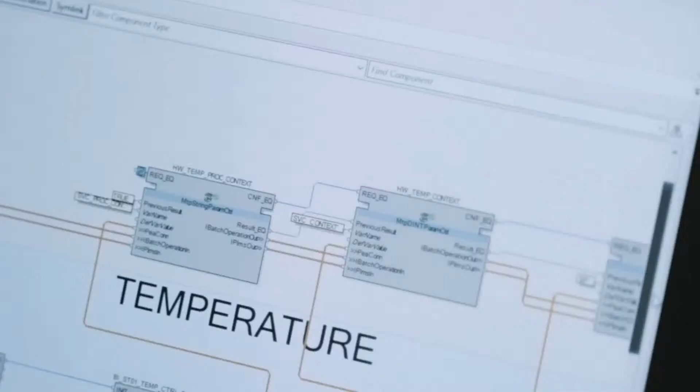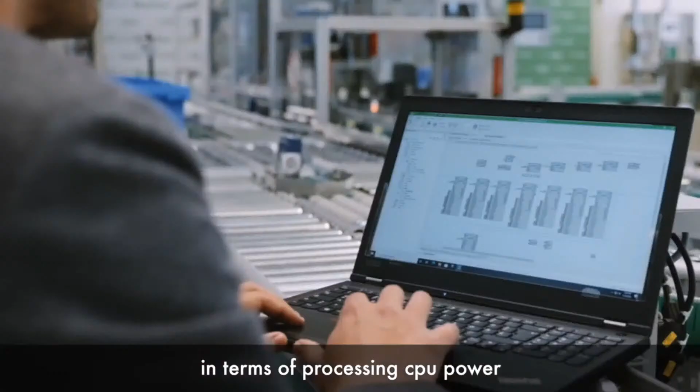universalautomation.org. It's about sharing a technology, a shared runtime execution engine. We call it a game changer in automation because we have, first, one technology which is based on IEC 61499, which is the standard which aims at decoupling hardware and software. Hardware itself is becoming very, very performant in terms of processing and CPU power, and the future is more and more about software. This approach is really a winning approach because it's very, very flexible. You develop the application once and you can reuse it in each different configuration.

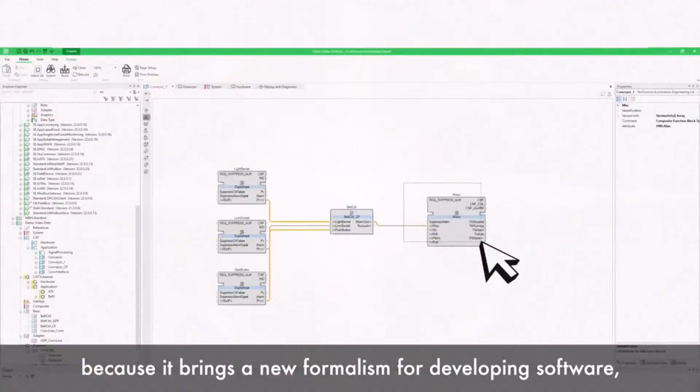That's exactly what Universal Automation and 61499 enables, because it brings a new formalism for developing software, which is object-oriented in nature and which allows deployment over distributed hardware for the actual final control system. So let's say that it's a marriage made in heaven.

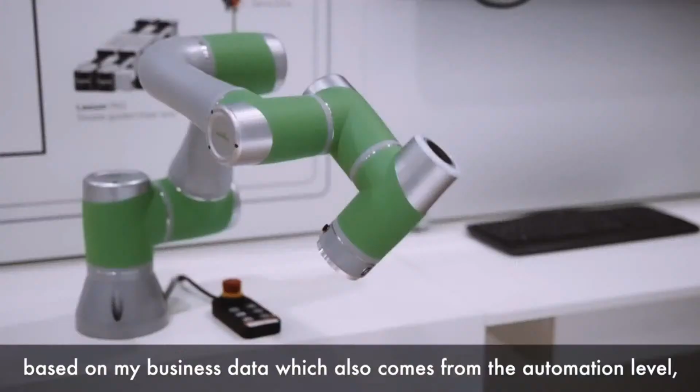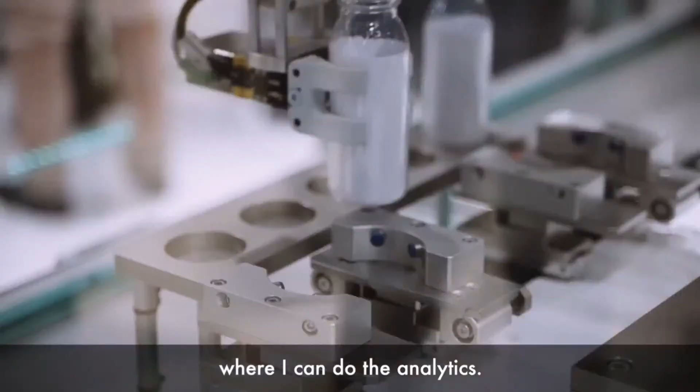So if I want to make more conscious decisions based on my business data, which also come from the automation level, I need universal automation to get this data in an efficient way and with the right engineering efforts on the level where I can run the analytics. Offers are available, not just from Schneider Electric with EcoStruxure Automation Expert, but also from Advantech, from Stahl, from ESA in Italy, and from other companies.

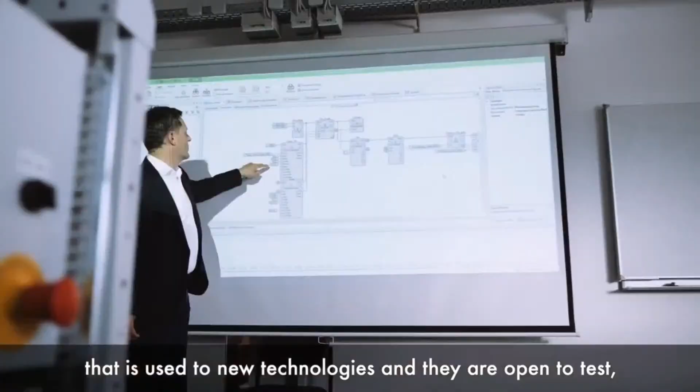Advantech is growing really, really fast. And I believe if you want to keep on growing in the near future, you need to be able to innovate. And when I see the universal automation approach, it is exactly the way of innovation we need to go with. Most of our customers from process automation are pretty conservative, so never change a running system. But now we see a new generation coming up, who is used to new technologies, and they are open to test, to try these new functionalities. And I think most of them pretty well understand the advantages of this.

I'm doing this now for 20 years, and I think over the years, this is the most exciting change. And from my experience, I see that in IT, for example, there has been a big revolution. And I expect the same in automation. I don't know when it will happen. Probably it takes a little bit of time, but probably a revolution will come.

Good morning, good afternoon, everyone, and welcome to this new edition of the UAO Goes Live. Second time this week, and this time we are going to go to Austria, where we discover a bit more about tools and tool concepts for 61499. And I'm happy today to welcome on stage with me Professor Alois Zoitl. Hi, Alois. Hello, everybody. Hi. Yeah, it's a pleasure to have you with us because for sure you are one of the icons for 61499. So having you with us on stage is always a great pleasure.

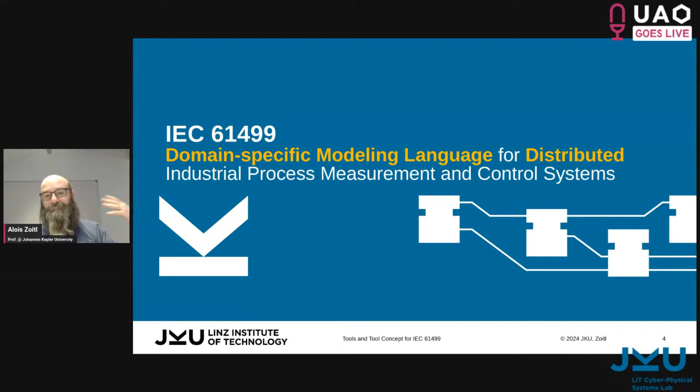In the setting that we are, I will not talk about what 61499 is, but I would like to tell you that we now have even measures. So friends of mine from Vienna University of Technology, Peter Gsellmann, Martin Melik-Merkumians, and Georg Schitter did this very nice work where they used code metrics that were developed to compare different solutions and different languages. And they implemented classical sequential processes and continuous processes in 61499 and 1131 and compared them and compared the complexity.

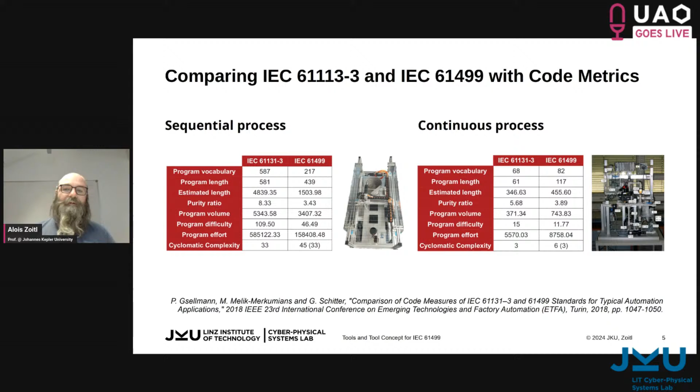And as I said in the introduction with Greg, I want to talk today a bit about what we did in order to leverage the potential of 61499, because my hypothesis for quite some time now is that 61499 from the language perspective is very powerful, but as it's nicely said, a fool with a tool is still a fool. So we need to learn how to use the tool, how to make tools for 61499 to, in the end, get the best out of it. And what I brought here today is an overview of some stuff that we did. It's not all, but I took the highlights of it.

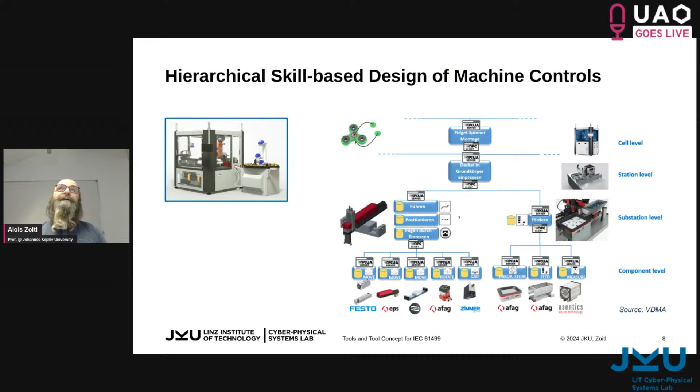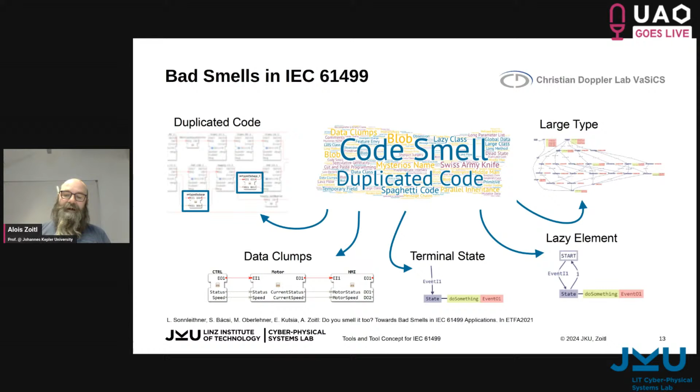And you see here a word cloud of all the different bad smells that were already identified in industry. The big one is duplicated code. There is a Swiss Army knife, spaghetti code. Shotgun surgery is also a very nice one. Cut and paste programming, which unfortunately is still around a lot. You see here certain examples that our first work identified. And one work that I personally like a lot is the topic of feature envy. Feature envy is a kind of measure for badly structured code.

Nonetheless, Lisa Sonnleitner again did that work, found two potential ways and mapped them to 61499. One is the feature envy factor that shows how well a certain function block or module is structured and how much it's connected to the outside. And the other one is the so-called distance metric. The distance metric is even nicer because it gives a connection-wise distance between two blocks, and the distance metric even allows giving hints.

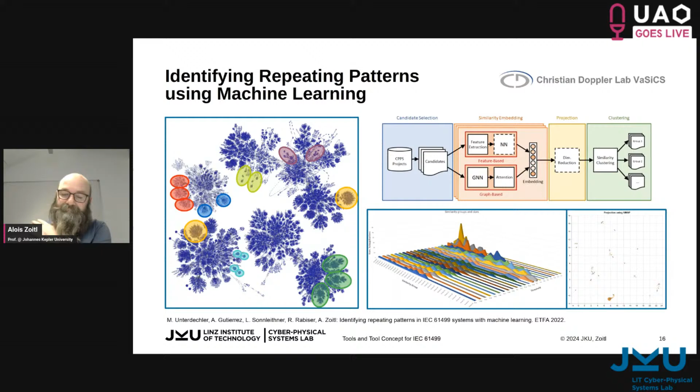When the people showed me the first results, they were not convinced, and they showed me some similarity things, and I found this quite nice because as a control engineer, I could immediately see what the similarities are and what not. So having tools like that can really help to find duplicated code, find similar code, which can later be refactored, reworked to help us get better maintainable code.

We work also on language extensions. What Greg did not say, since 2008, I'm also in the 61499 standardization committee. Since 2015, I'm somehow the convener of the 61499 working group. And as part of that work, I'm also interested in what are the limits and the problems of 61499. So if you find these kinds of things, I would be happy if you drop me an email or send me some kind of message so that I can get that. And we work on language extensions or investigating certain boundaries of the language.

And one thing that is investigated by different researchers is: can we provide more information for tools and users on how to use function blocks? One approach would be so-called interface contracts, where you specify in some way the intended use of your function block.

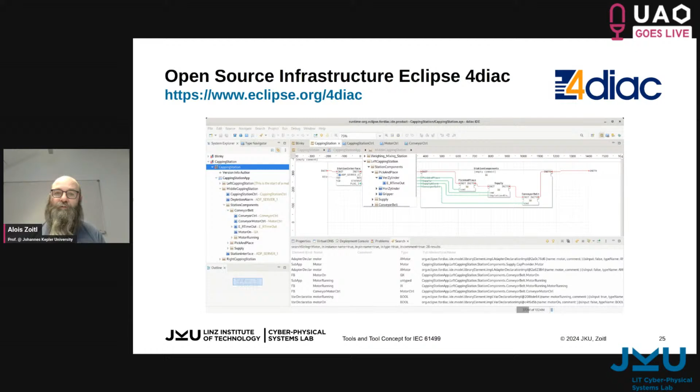Also, we are investigating additional new features, and advanced tool concepts like the assessment of code quality, and other things that I would like to show you now. So one thing that we noticed, especially for very large projects with lots of elements, is that you're very often limited to certain levels of complexity that you can see.

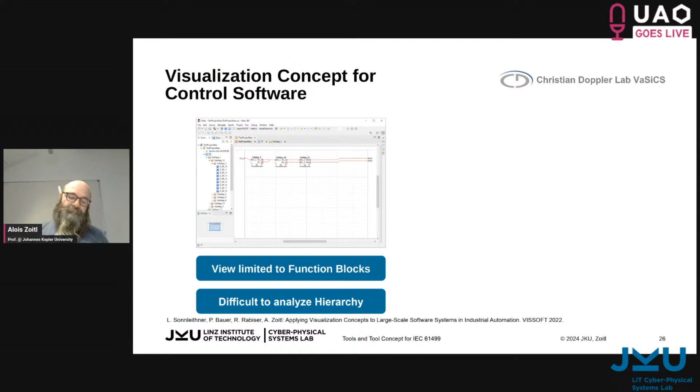Either you get very big sheets with lots of function blocks, or you structure them in sub-applications and composite function blocks. But in German, we have this saying about trees and woods, that you don't see the wood because of all the trees. So you are totally lost in the details.

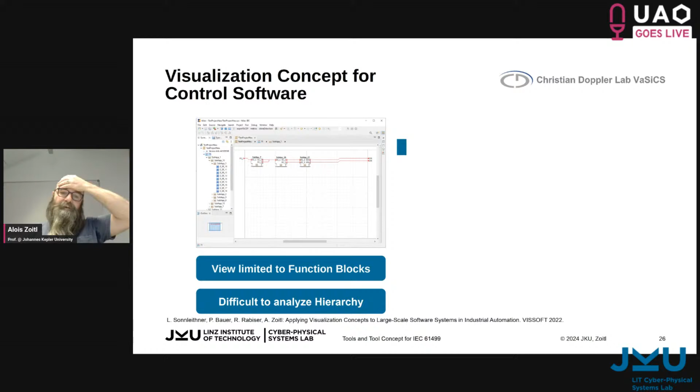And Lisa Sonnleitner, together with Philipp Bauer, developed a concept where we try to show these big applications and all the connections, what's going on, in a dedicated visualization. So what you see here is the output of a sample application that we developed to test the tool.

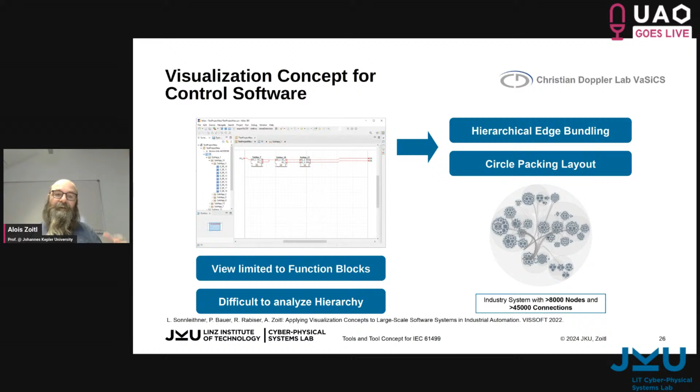So you see here lots of things are coming out of that point, going in different directions here. So it would be interesting if it's bidirectional or unidirectional. So we have already additional concepts with that. But developing tools has a big problem, because tools have users.

And there was a very nice keynote two years ago by Bran Selic. It had the title, "What's Wrong with Users?" And in the end, it's very important to note users are never wrong. The users just don't understand what you thought, and then it's maybe a problem of how you develop the tools, what tool concepts you use.

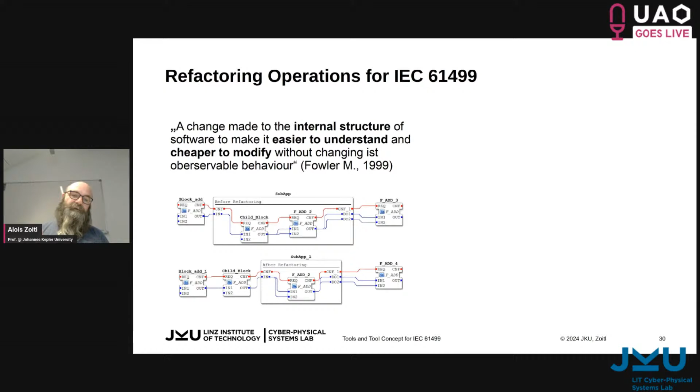And we did a study on how we can define refactoring operations even independent of the language. So you see here an example of Simulink. There was some work on Simulink doing that kind of work. So we learned something from Simulink, but also we came up with currently 52 refactoring operations. Not all are yet implemented, but many of them you can find now in 4diac IDE. And we also found refactoring operations that we originally developed for 61499, which we saw could be implemented also in other languages. So that's something for people who are implementing different languages, different kinds of tools.

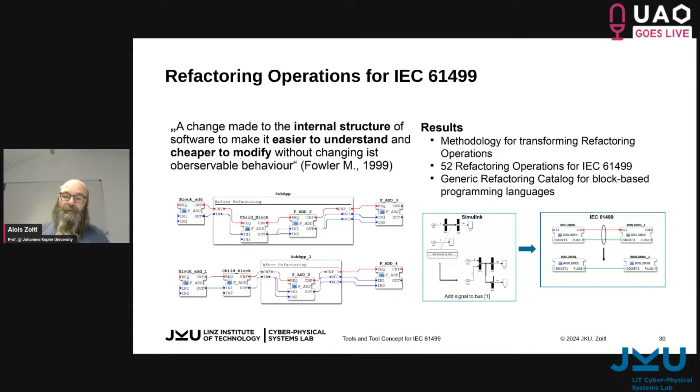Yeah, and with that, I'm at the end of my overview. I hope it was enjoyable. The classic question in the end, are we there yet? Unfortunately not, but still we are a big step further. So I hope you find that interesting. We would also like to get your feedback on certain features, how we can improve it, things that we may have forgotten in our investigation. And therefore, I'm very happy to have been able to present here.